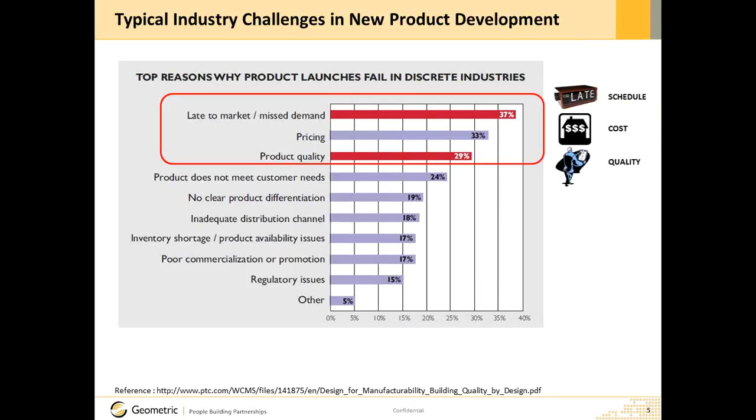Can design influence manufacturing time? Definitely. Choice of a thick wall in case of plastic parts, choice of a slower manufacturing process. For example, sharp corners in a machined part could lead to choice of EDM as the manufacturing process, thus impacting not only time but also cost. Choice of exotic materials could lead to higher material cost impacting pricing. Tight tolerances lead to additional secondary processes, thus increasing manufacturing time and cost. They also put a higher demand on machine process capability, possibly impacting product quality.

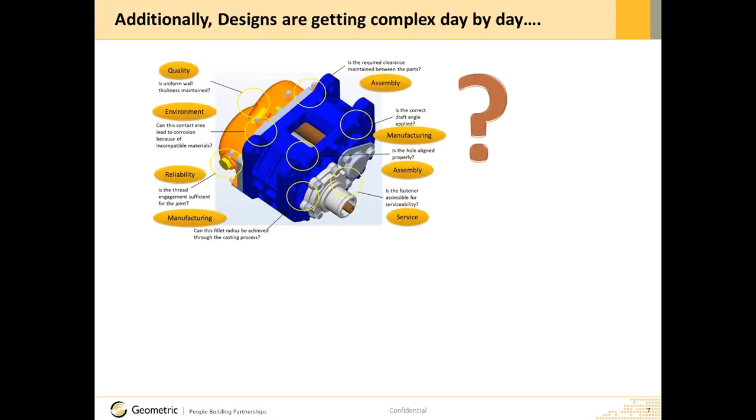There will be rework, impact on quality, higher cost, and whatnot, finally leading to failure of the product in the market. How can you as a design engineer address these challenges in a systematic manner? By applying Design for Excellence or DFX in the design process in your organization.

Design for Excellence consists of methods, guidelines, standards, and checks for creating better products focused on providing benefits in multiple stages of the product life cycle. Geometric provides solutions for organizations to practice and implement Design for Excellence in a systematic manner.

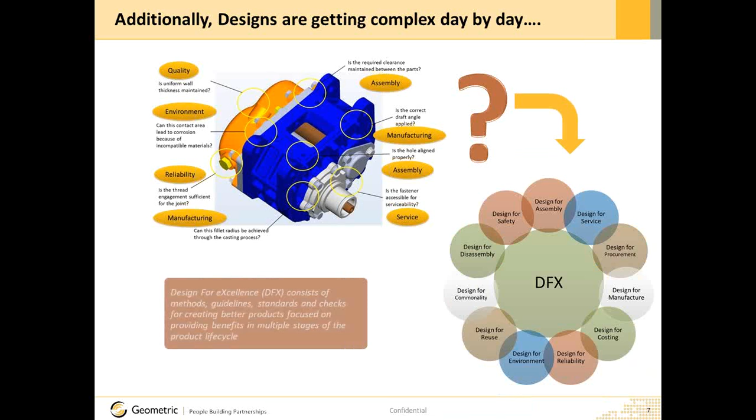Geometric DFX is an extensible standalone platform and framework which facilitates the DFX initiatives in your organization. It consists of various components such as inbuilt best practices, a rule engine, packaged technologies such as feature recognition, thickness analysis, among others. Also, report generation facilities. The DFX rules or best practices are derived from various sources such as in-house manufacturing experts, customers, design handbooks, and various standards.

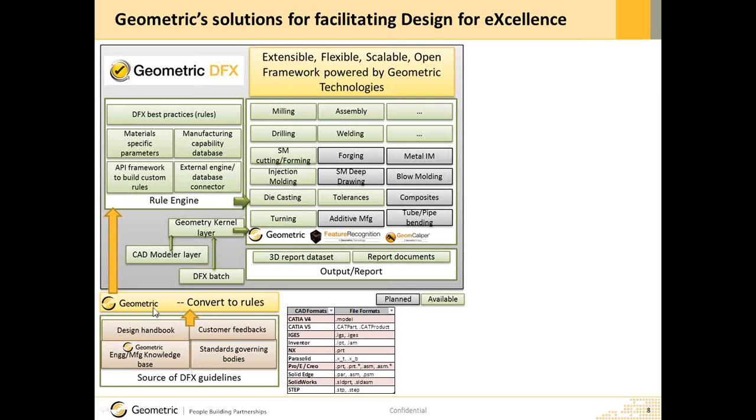For ease of use of this solution for design engineers, we have packaged the solution focusing on manufacturing and assembly and created an add-on on popular CAD systems such as PTC Creo Parametric, Siemens NX, and SolidWorks from Dassault Systèmes. DFM Pro brings the extensible and customizable Geometric DFX framework to your CAD system. Today's demonstration will explore DFM Pro for Creo Parametric in depth. Watch out for forthcoming web sessions covering other CAD platforms.

What does an easy-to-use design for manufacturing validation solution for design engineers need to have? A CAD PLM integration, a strong, extensible, and configurable knowledge database, and a facility to collaborate with effective reporting. In the following demonstration, we will see how DFM Pro provides this and much more. Let's shift to a live demo.

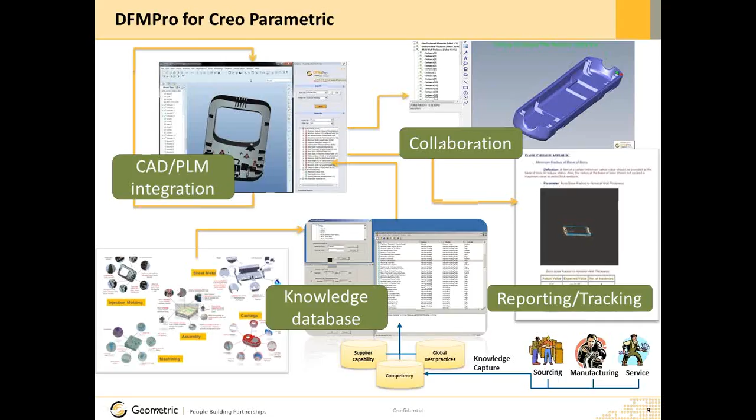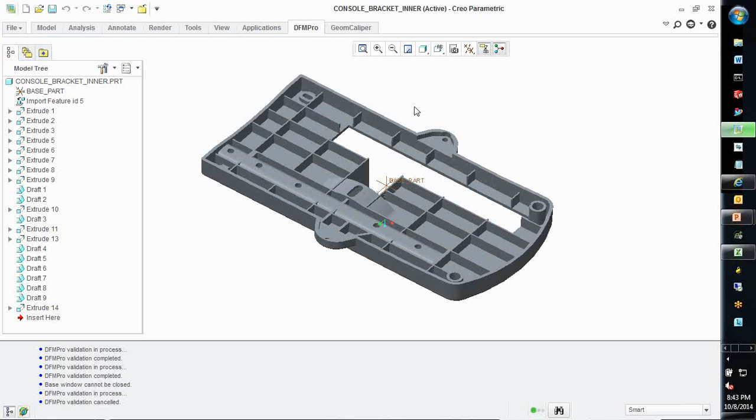I have Creo Parametric open on my screen now. As we can see here, DFM Pro is tightly integrated within the CAD environment, in this case, Creo Parametric. DFM Pro will provide recommendations to ensure that your designs are created as per well accepted global and organizational best practices. Let's consider a regular use case in the design of a plastic part which has to be injection molded. We have reached a logical state of the design.

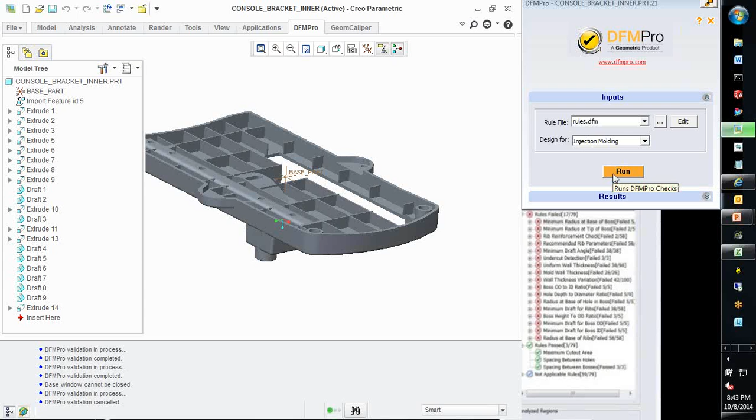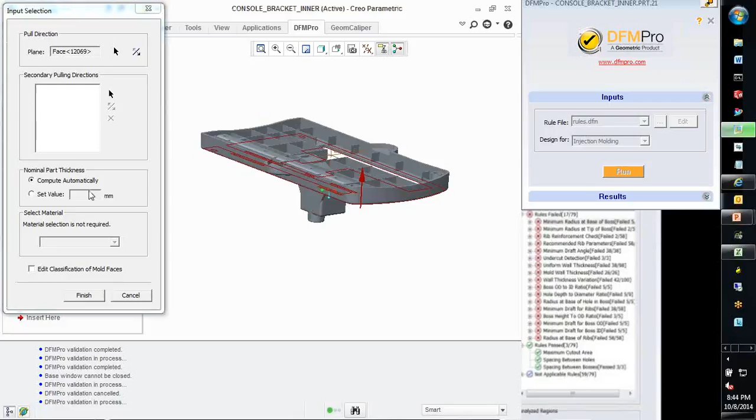As a design engineer, I want to validate my design to ensure that it is going to be easy to manufacture. DFM Pro can be launched at the click of a button. I select the relevant manufacturing process, in this case injection molding, and start the validation. For injection molded components, DFM Pro will identify the pulling direction along which the mold separates. If required, we can flip or change this direction. Additionally, DFM Pro will also compute the nominal wall thickness of the part, which can also be overridden by the user.

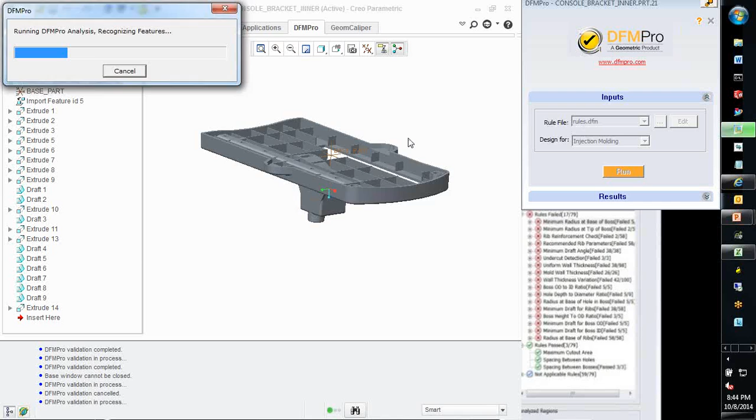In addition to the manufacturing process, the second input for DFM Pro is the rule file, which contains the list of checks to be used for evaluating the manufacturability of this model. DFM Pro identifies all the manufacturing features on this model. For plastic parts, features like nominal wall, draft angles, ribs, bosses, and undercuts play an important role in determining manufacturability. Based on the identified features and their parameters, rules specified in the rule file are applied, and any recommendations are shown to the user in the results section.

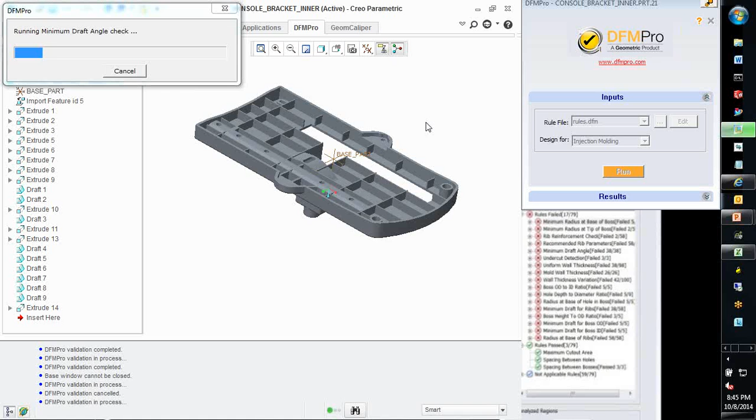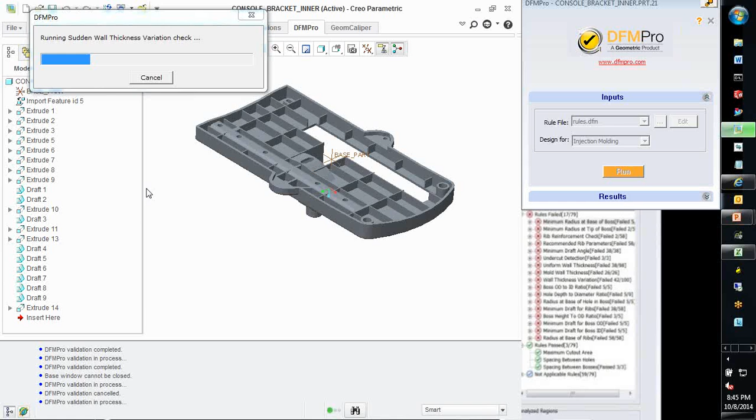What's important to me as a design engineer is quick identification of those areas of the design which can negatively impact manufacturing quality, time, and cost. DFM Pro helps you do exactly that. As you can see here, it processes each individual rule which is selected in the rule file. Manually validating this design would take hours, whereas DFM Pro can do that for you in a couple of minutes. Now on the right hand side of the screen, we will see the results in the results section.

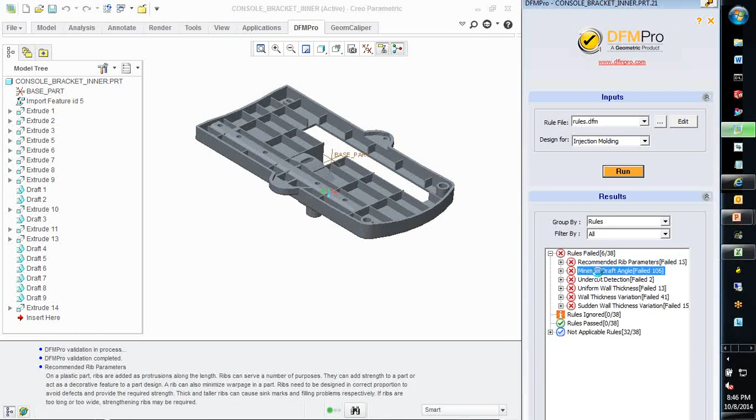When I click on any rule right here, in the message window or the dashboard area at the bottom of the screen, we can see the corresponding summary of the rule. This provides the required explanation so that the appropriate downstream manufacturing knowledge is made available at the design time, right when it matters.

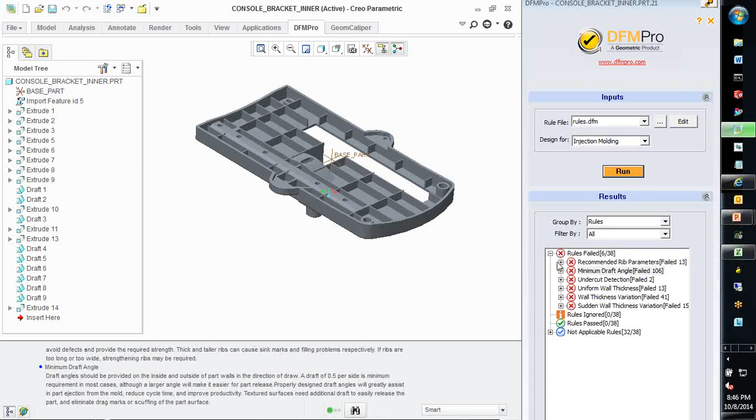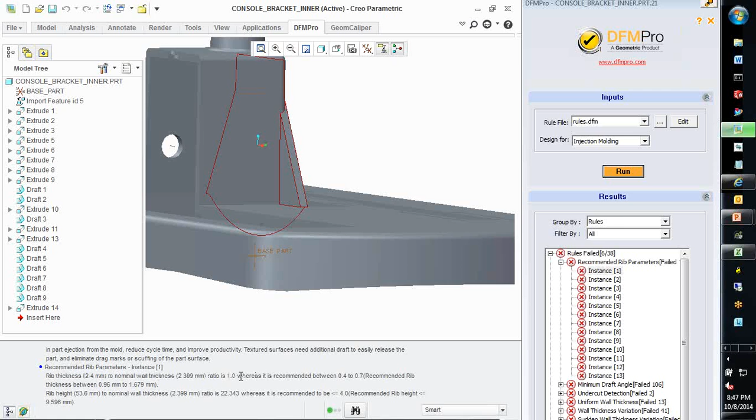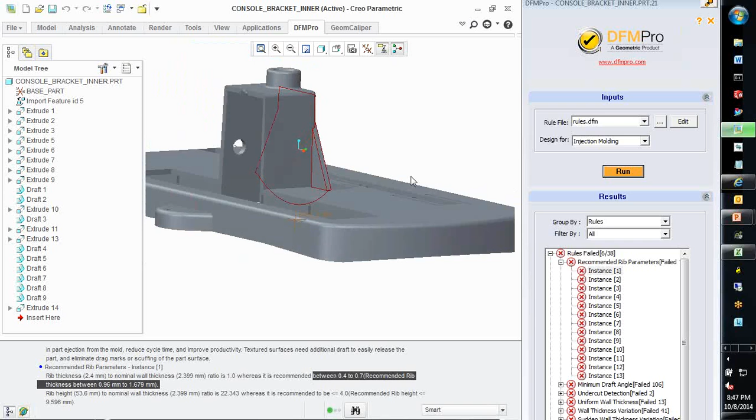For example, here this instance tells me that the rib is too thick; the rib thickness to nominal wall thickness ratio is too high. It not only shows me the associated rib in the graphics area, but it also shows me the current value in the dashboard and the recommended value. This helps me improve my design such that it will be easy to manufacture without defects. Thick ribs can lead to sink marks, hence I need to reduce this thickness. I can get more information about the reason behind this recommendation by launching the help file.

In addition to a compiled help format, the help file is also available as an HTML document so that organizations can host it on their intranets and edit the help file to include their own internal best practices and tribal knowledge. The help file provides a detailed explanation of the rule, the recommendations with an appropriate image.

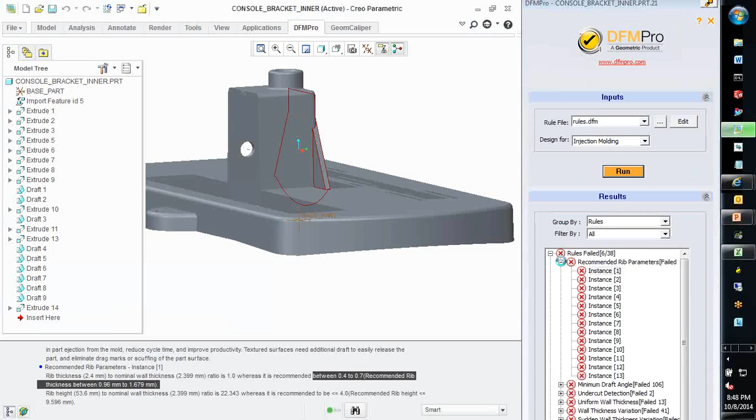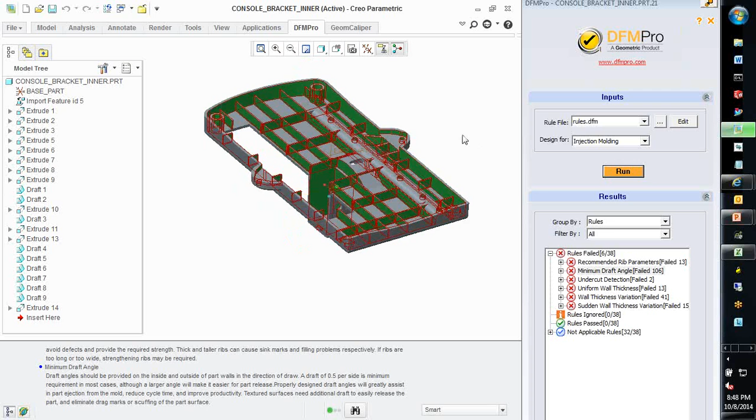We can see that there are too many failures for the minimum draft angle rule, and I know the reason for this. I have not applied any drafts as per my normal design practice. I will apply draft when I am done with the basic design and before I round the sharp corners.

This check in DFM Pro helps me ensure that I don't miss out on any surface for the required draft. Thus, DFM Pro watches my back while I concentrate on the design functionality. I do see instances during the daily design activities where DFM Pro helps address any oversight on my part.

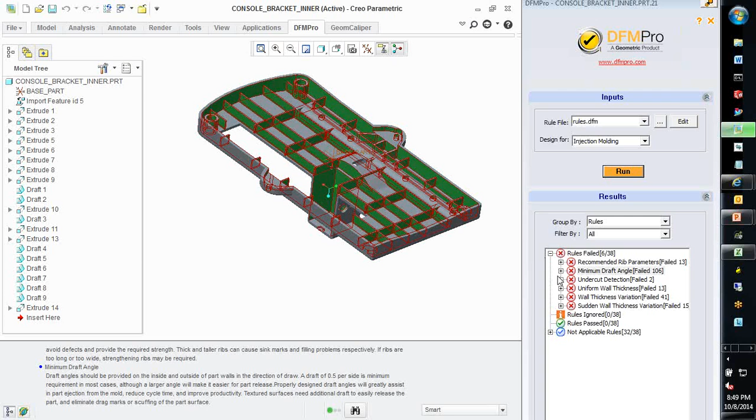Now look here. This is a modeling error and it has led to an undercut. Definitely this is not intentional. Undercuts would need side actions, lifters, moving cores, thus leading to additional time and cost. The undercut detection rule identifies such regions in the model.

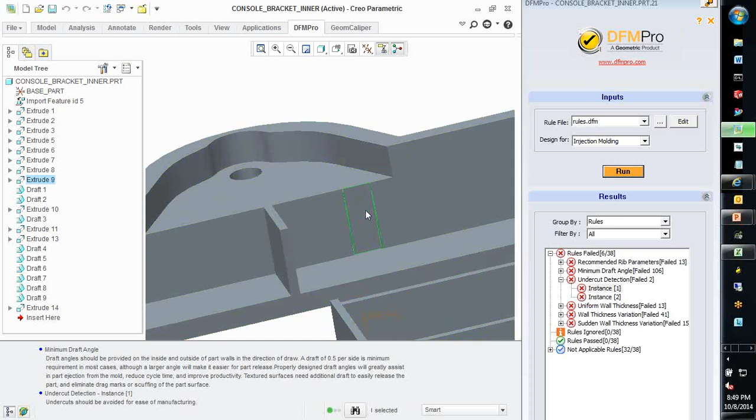I can then decide if it can be eliminated by slight modification of the design or it needs to be handled in tooling. For this part, I need to figure out how to correct this modeling error. Can I just delete these faces or modify the related feature? That's part of the CAD design process which I do every day.

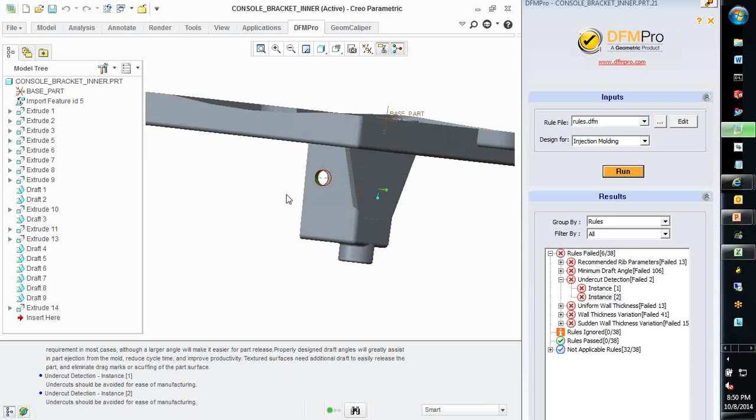On the other hand, in this case, I have a feature here which is an undercut, but this is a design requirement. I know it is going to require additional tooling, but I feel it cannot be avoided, so I am going to go ahead and ignore it. I will capture an image and add my comments.

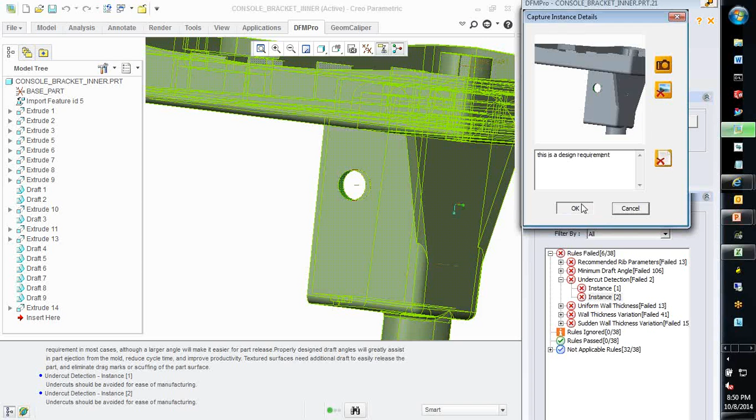These details will be communicated to manufacturing when they look at this part, and my DFM report. We'll come back to the cool reporting aspect in a short while. Thus, we can see DFM Pro helps me detect many of the downstream issues as I am designing my part.

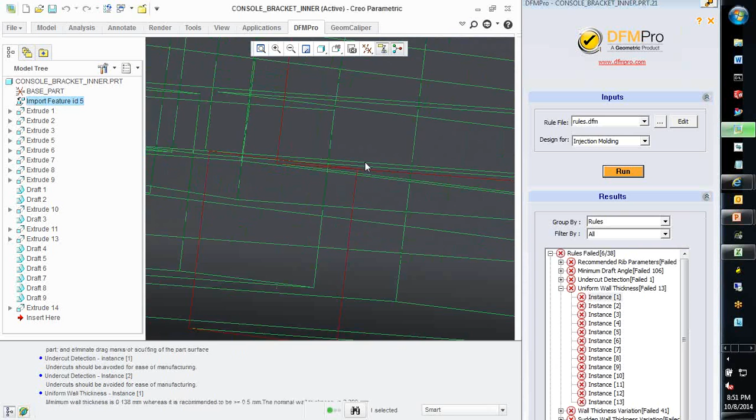DFM Pro also helps detect thick and thin regions in plastic parts. The uniform wall thickness rule checks areas which can cause problems during filling and also lead to quality issues. Here we have a region which is very thin. In the message window, we can see that it's just 0.138 mm, far less than the recommended value.

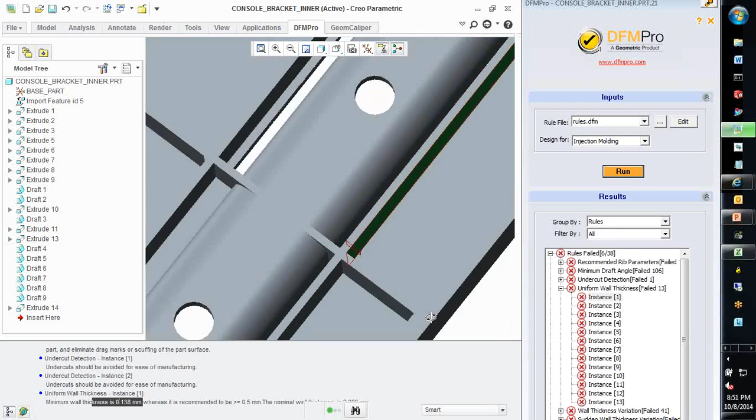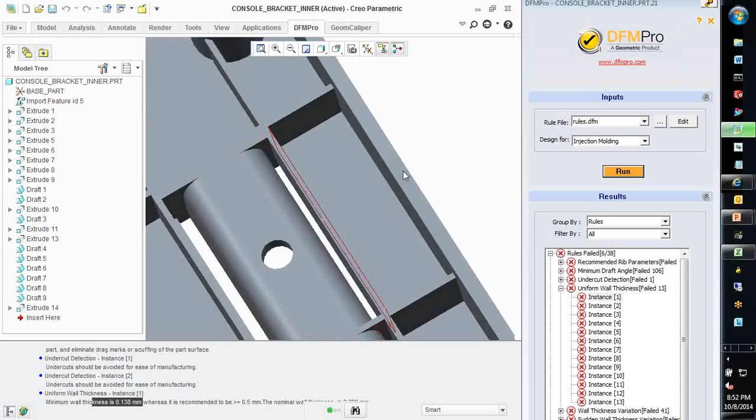On looking closely, we can see that a depression on the other side has led to this thin region. I will collect all the information required, know more about the rule, and then I can correct the design. Let me add a round here to increase the thickness.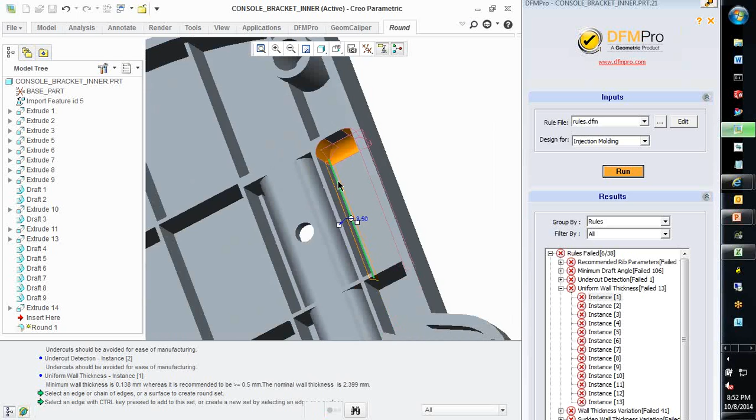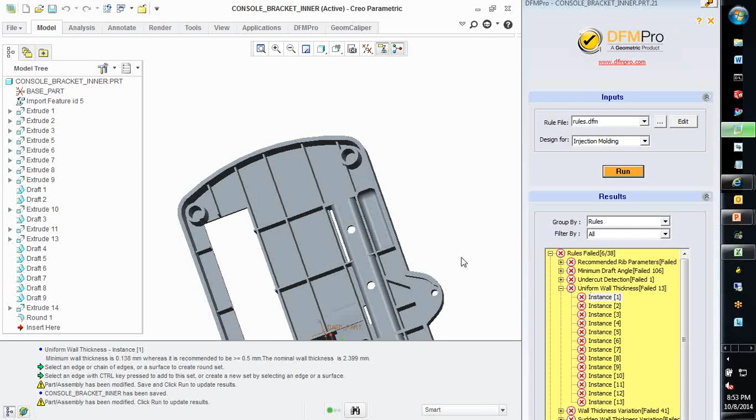Now that I have modified my design, I can rerun DFMPro and check what is the impact. As you can see, the background turns yellow, telling me that the results are not in sync with the design.

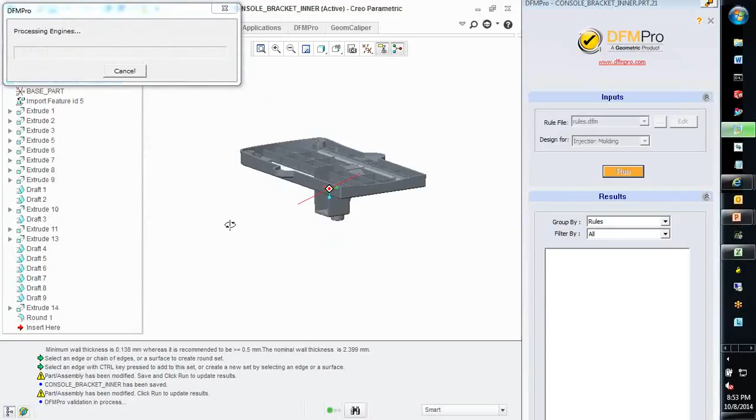As a design engineer, I am interested in quickly verifying the design, understanding the reported recommendations, and improving the design iteratively till it is as per the recommended guidelines of the organization and fulfills the design requirements. DFMPro helps make this iteration happen on my desktop before it can be sent for review or for manufacturing. Thus, a lot of review hours and rework can be avoided.

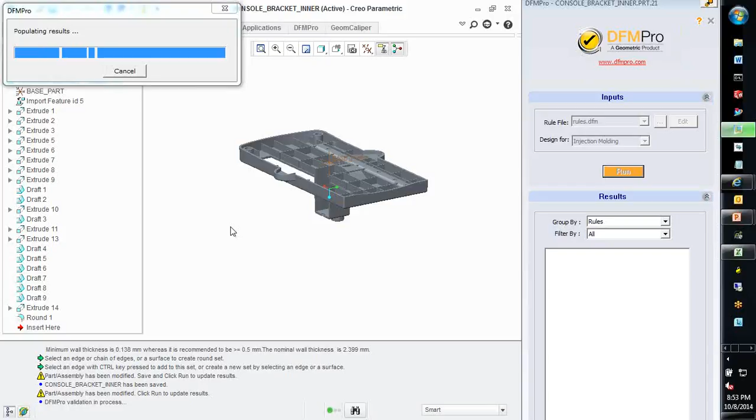In this case, DFMPro will relook at the design, identify the modified region, recheck that region, and present the results to me as before. We will see that the count of the wall thickness recommendations will decrease because of the design improvement. And yes, the count has decreased from 13 to 10. That region has now passed.

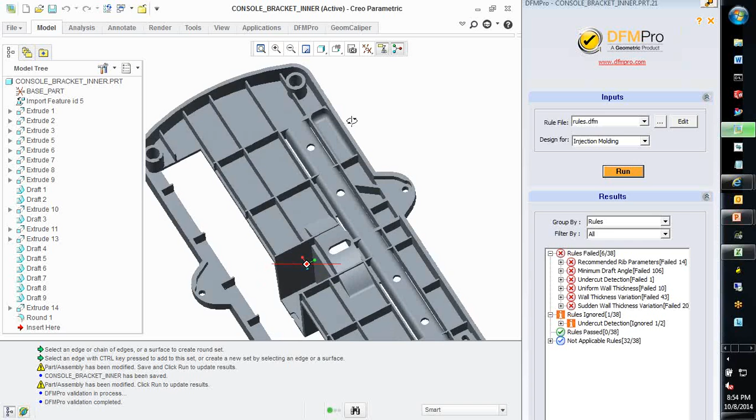It's not necessary to run DFMPro after every design change. You can keep on doing your design modifications, look at the results, and after you have done a few of them, you can iterate over the design to ensure that you can move to the next step.

Another aspect you may be wondering about is the rule file I mentioned earlier. Where do these rules come from? How do I configure them? The process is very simple. As a design engineer, typically you will not need to look into those details. But let me just show you what's going on behind the scenes. I clicked the edit button to launch a small utility called the DFMPro Rule Manager.

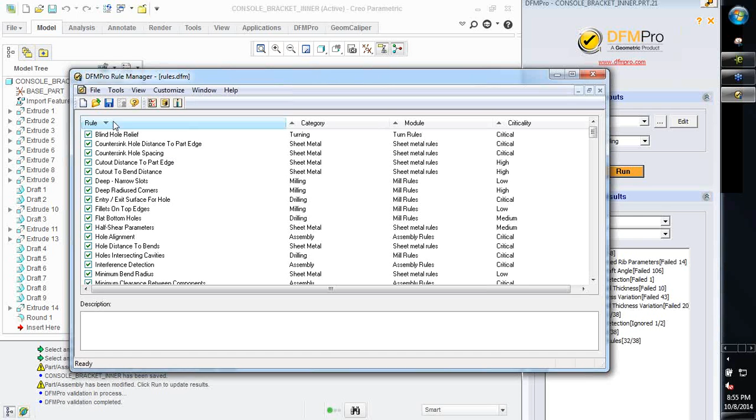Typically, when organizations deploy DFMPro, it can be used out of the box with inbuilt best practices and configurations, or we can create new rule files, select the appropriate rules based on the manufacturing processes in the organization, configure the ones which are required for modification, leave the other ones, and save the complete set as a rule file. This rule file can be reused again and again.

Rule file creation is typically a one-time or infrequent activity. During day-to-day design, I don't even need to click the edit button or look at the rule file. Using this mechanism, DFMPro helps organizations capture not only the organizational best practices, but also supplier-specific ones, and make this downstream knowledge available when it really matters. That's during the design stage. This helps me save a lot of rework using the power of the knowledge available at my fingertips.

As part of the design review process, DFMPro also helps me quickly generate reports which I can submit for review. DFMPro supports three kinds of reports. First, a 3D report in the eDrawings format, an XML report which can be viewed in the web browser, and an Excel-based report which can be used for tracking purposes. Let's look at these reports individually.

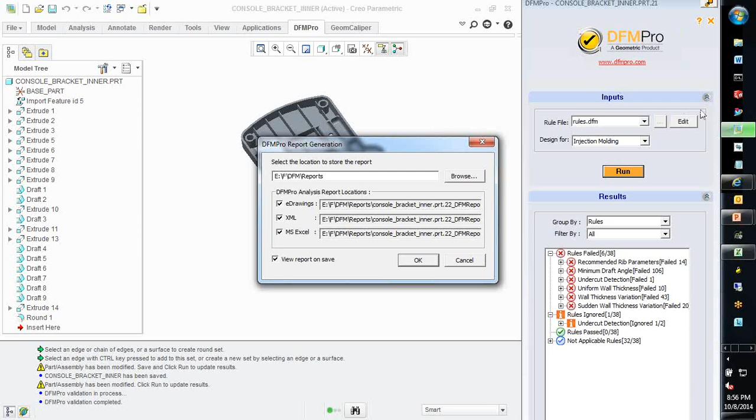The XML report provides a summary of the complete manufacturability analysis, starting with the environment and the settings. It presents a summary of the results and information of how many instances were validated, how many passed, how many failed. This is repeated for every rule.

For every rule parameter, a table is presented to the user which shows the actual value of that parameter in the CAD model, the recommended value specified in the rule file, and the number of instances which failed. We can see that this information is common for all rules. The ignored warning is also captured separately.

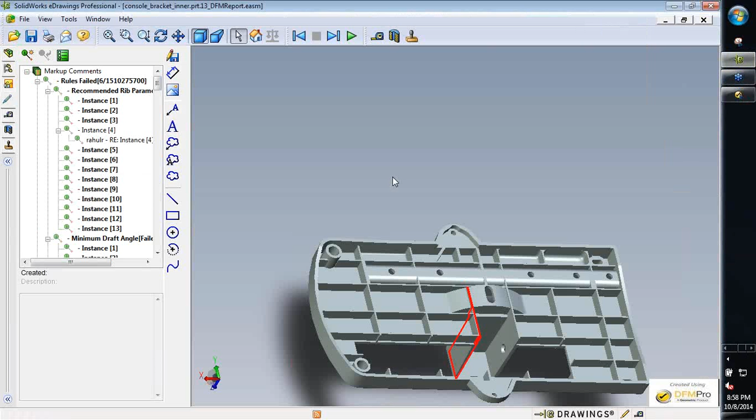On the other hand, the 3D report is more interactive in nature. It contains complete information about the analysis along with the CAD model in compressed format. It can be viewed in the free viewer and is delinked from the CAD system. Hence, it can be shared with any user inside the organization or outside who may not have access to the CAD environment. Thus, it forms a very easy means of effective collaboration.

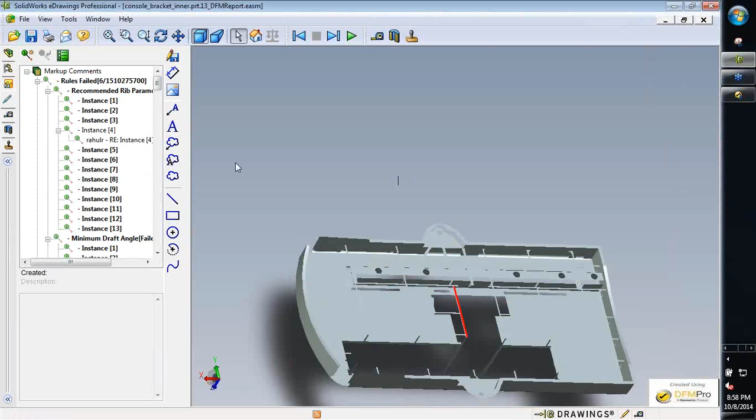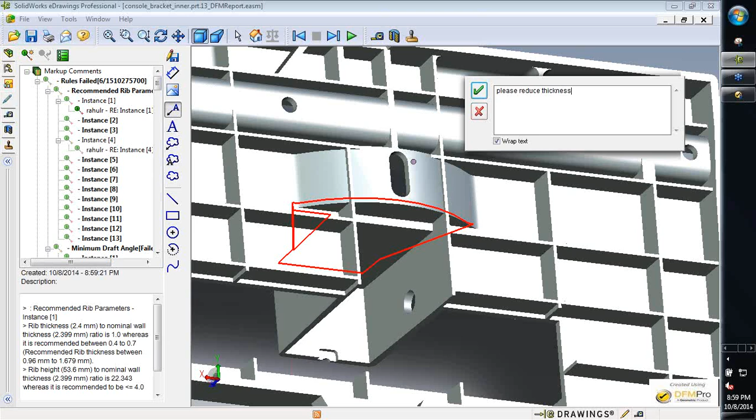Just like in the CAD environment, when we click on any instance, it is highlighted in the graphics area and the recommendation is shown in the description area at the bottom left corner of the screen. In addition to this, it also has annotation and markup facilities. This helps me record my comments in that same report. That's why it becomes a very effective and easy tool for collaboration.

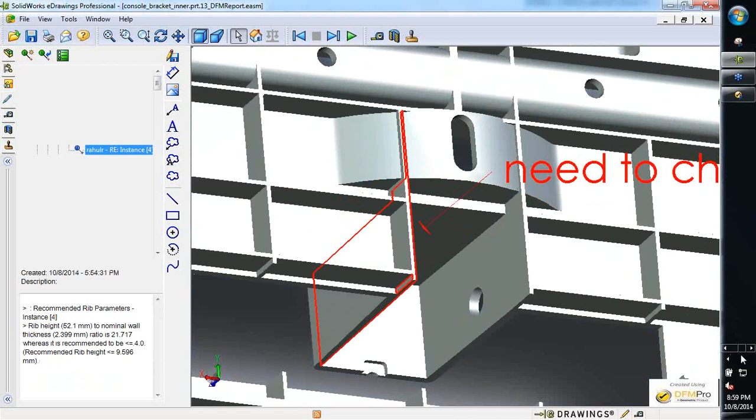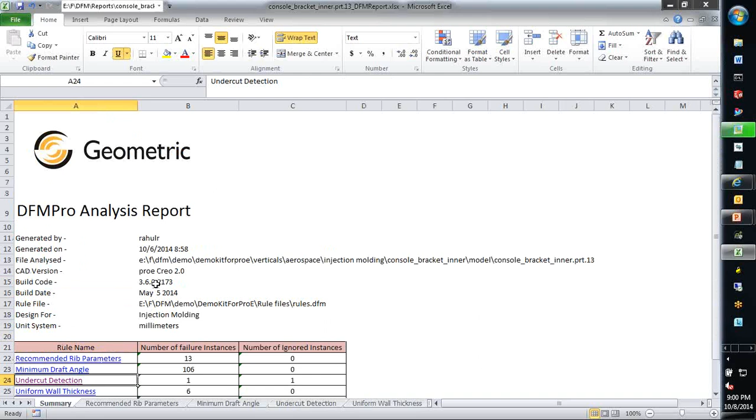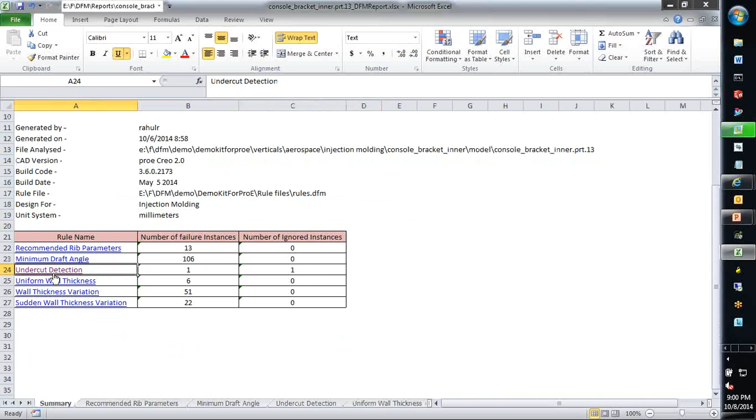The Excel report is very useful for tracking purposes. Based on a customizable template, it provides a summary sheet with links to individual results for every rule. In the detailed rules page, we can see there are additional columns for tracking your action items to closure. Ignored items are also captured with the image and the additional comments.

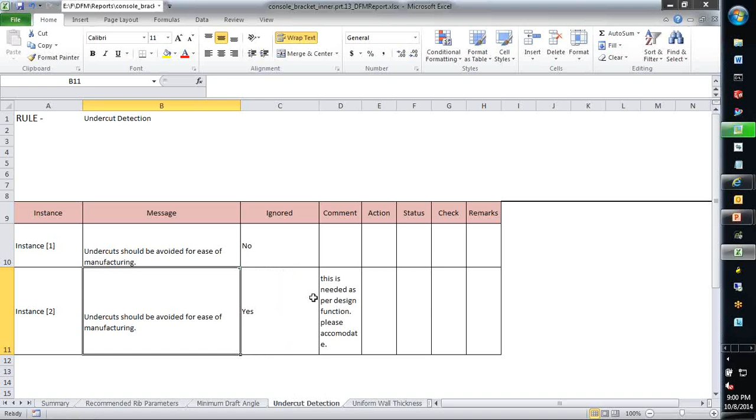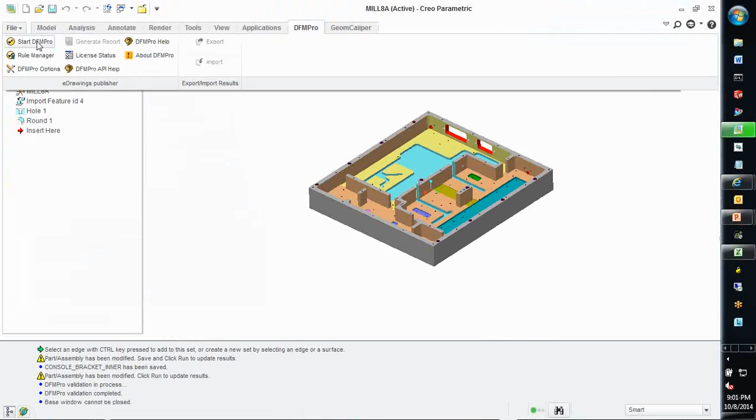As a design engineer, I work with not only plastic parts but also machined sheet metal parts and assemblies. DFMPro helps me during design of those parts as well. Let's look at a machine component. The same rule file can be retained for all processes. I'll select prismatic mill as my manufacturing process and execute DFMPro. For machine components, features like holes, pockets and slots are identified.

Since we use our patented feature recognition technology for identifying the features, the same results would be obtained based on the final geometry of the model, irrespective of the design steps. Even if the model is imported, say as a STEP file from a different CAD system, you would still see the same kind of results. In this part, you can see it's a mixture of imported geometry and certain design features.

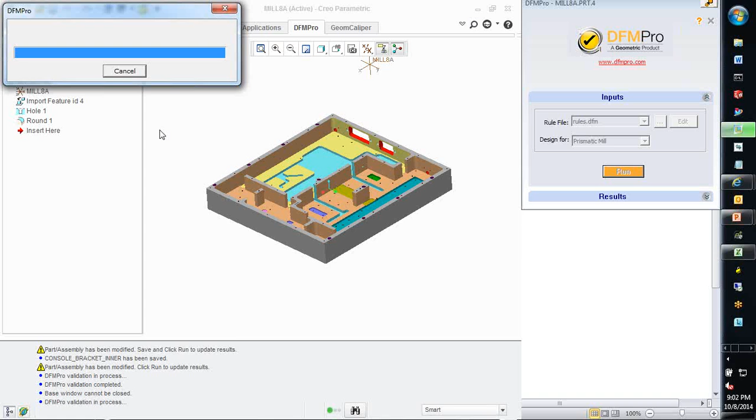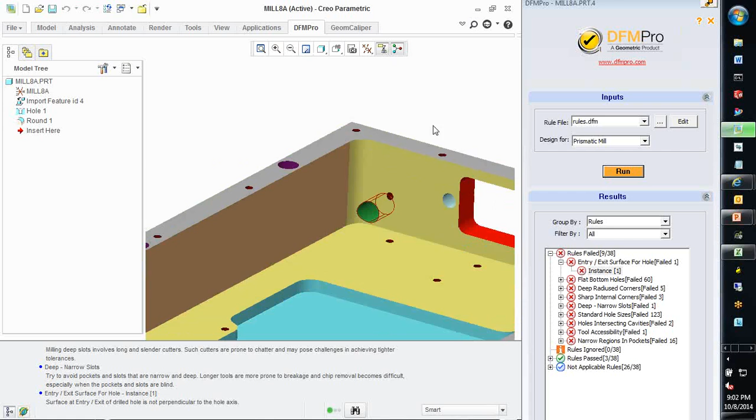For machine parts, important considerations like angular holes, sharp internal corners, deep narrow slots, deep radius corners. All these checks are done in a couple of minutes. Let's go quickly through some instances. Here we can see that the hole exits on a non-planar surface, which can cause drilling problems. We have many examples of flat bottom holes.

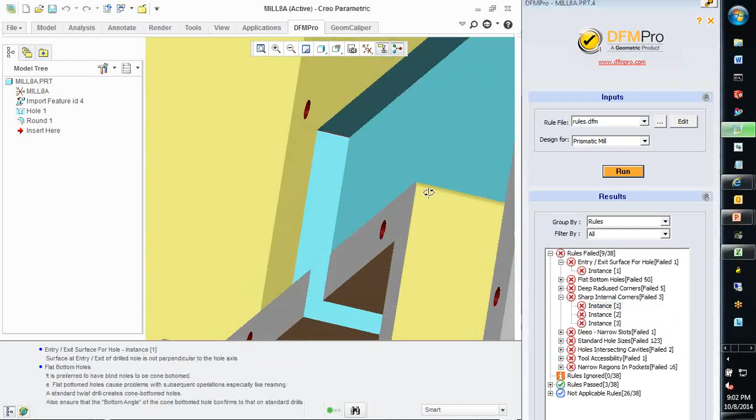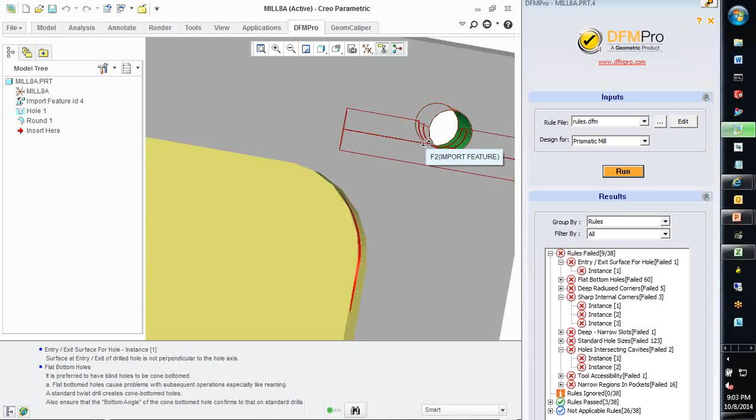Here's an example of a pocket with sharp corners. Here are two intersecting holes, but the axis is offset. So this can cause drilling problems again. You will find that this dashboard area provides the reason for this rule and what can be the recommended action.

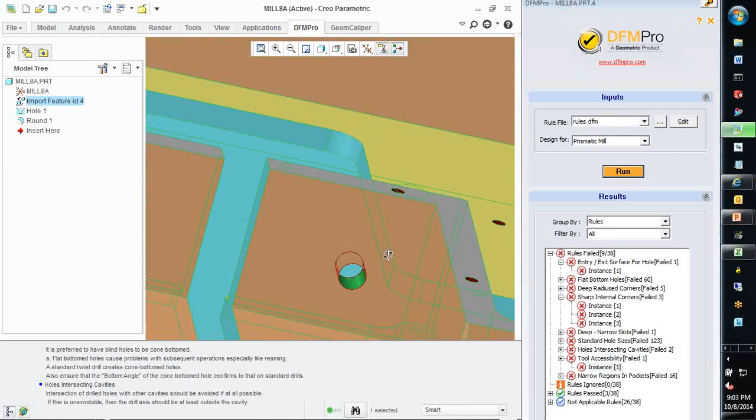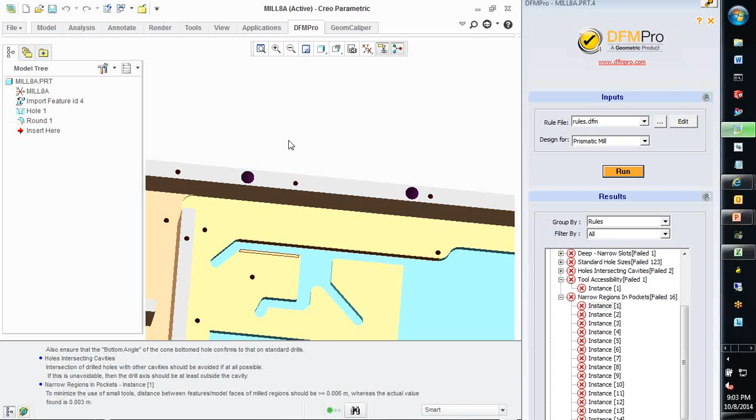Here's one instance of an inaccessible feature. This rule detects such narrow regions. Do we have a tool which will ensure that this area can be machined easily? Based on the configuration, DFMPro can help you check very quickly whether your part is easily manufacturable or not. Let's look at a sheet metal example now.

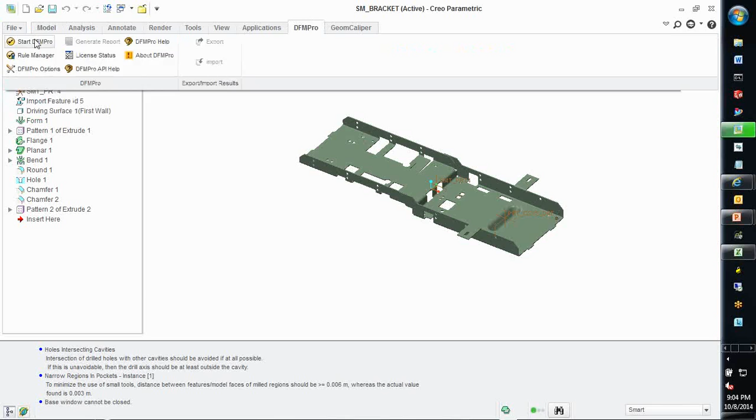In today's webinar, we are just covering a broad overview of the capabilities of the software. We will have follow-up sessions where we will cover each of these rules in greater depth and also cover other CAD platforms. Again, the workflow remains the same. I use the same rule file, just change the manufacturing process and execute. In case of sheet metal, features like bends, flanges, cutouts, stamps are identified and the selected rules are applied on this model.

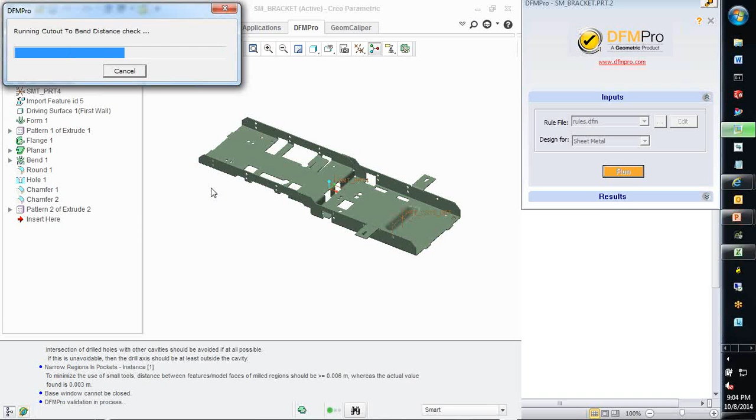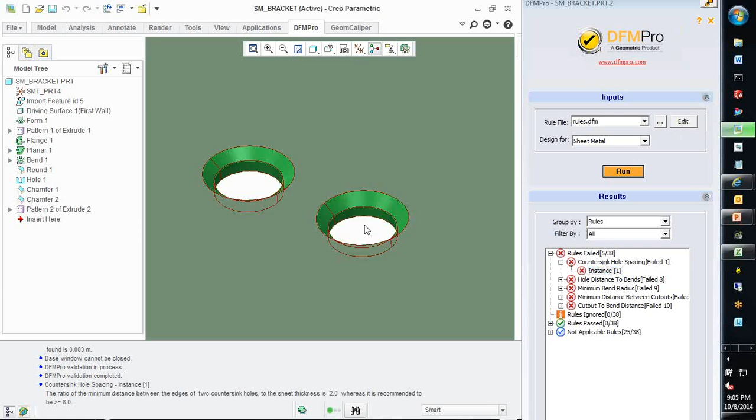The advantage of DFMPro is that even if you have designed the sheet metal part using normal modeling features and not using the sheet metal features, still you will get the same kind of results. For sheet metal, issues related to feature spacing, such as in this case, we have two close countersinks, or features being very close to bends, like in this case. Less bend radius based on the material configuration.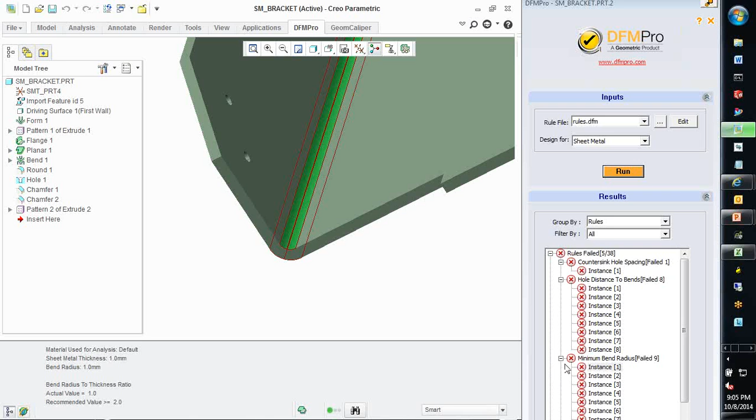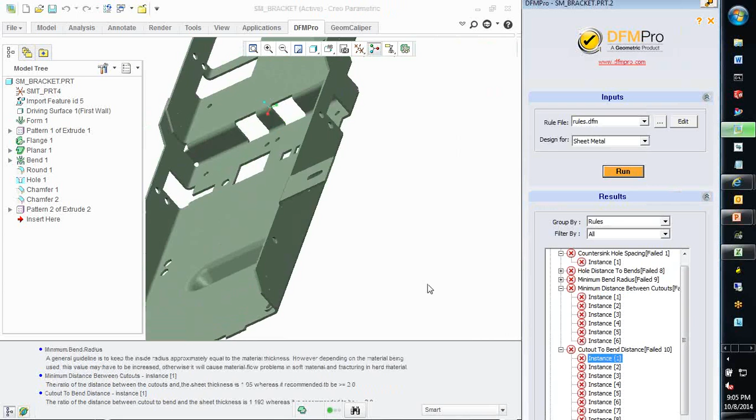Again, an example of feature spacing, distance between cutouts, the hole distance to this cutout, cutout distance to bend. These are just a few of the examples which DFM Pro can help you validate quickly as you create the design. And what about assemblies? You can also validate your assemblies using the same kind of process.

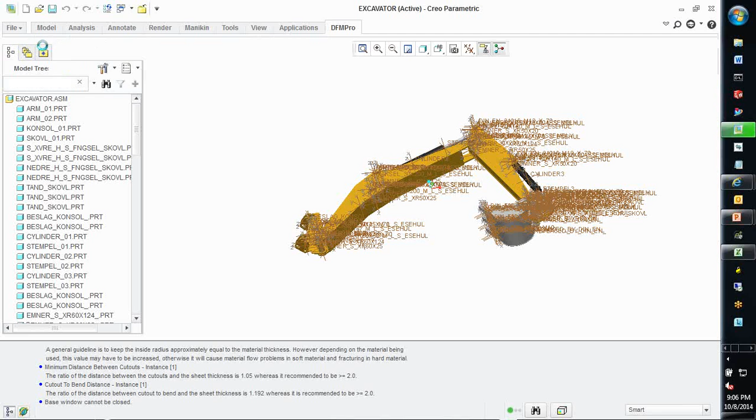I start DFM Pro, select the appropriate rule file. In this case, I select design for assembly because I want to check for the assembly process, and execute DFM Pro.

Assembly checks in DFM Pro include hole alignment, fastener clearance, fastener accessibility, interference, among others. The hole alignment check helps detect axial and angular misalignment of holes in the assembly. Fastener assembly checks help ensure ease of assembly as well as disassembly. This not only prevents some of the assembly problems on the shop floor, but also avoids operational issues.

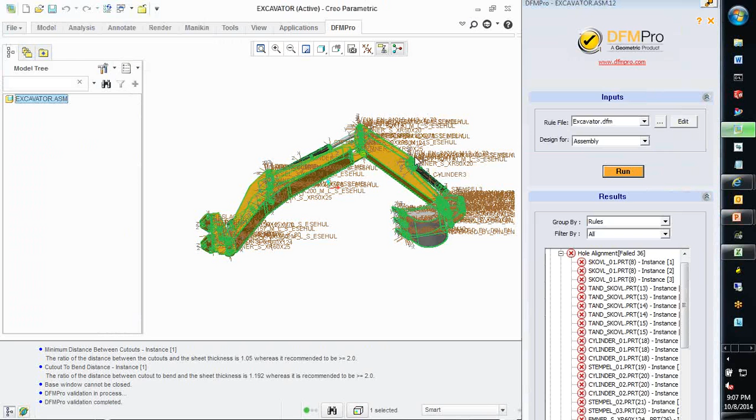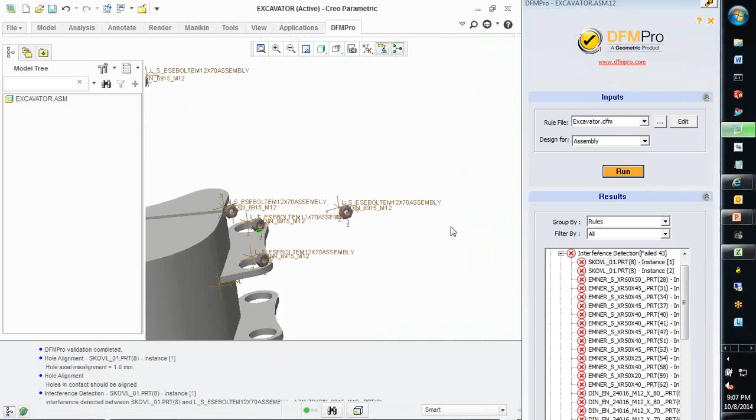Here is an example of a hole alignment issue. In the dashboard area, we can see the amount of axial misalignment. An example of an interference check, definitely this is not intended.

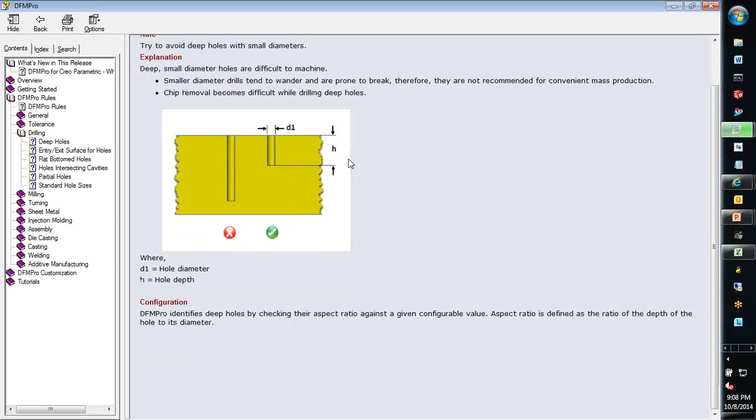Similarly, there are other checks related to fastener accessibility, fastener clearance, engagement length. Each of these have different benefits in terms of the assembly and disassembly on the shop floor or in service. We can get more information on all of these checks through the help file. Each rule has very detailed information covering the explanation, configuration, and any recommendations.

Thus, DFM Pro allows you to cover a vast breadth of processes and in each process a great depth of individual rules. This helps ensure that your designs can be quickly verified for manufacturability, assembly, and corrected right when you are designing them.

This demo was just a glimpse of the various examples in which DFM Pro can be useful for you. We covered a broad overview of the software and how it can help you in the design process.

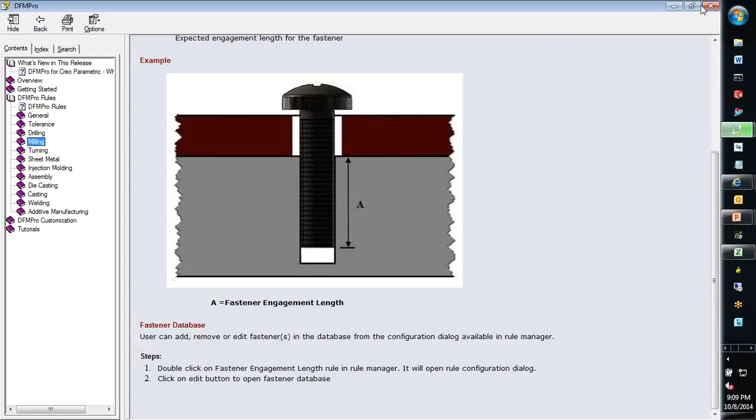Let's move back to the presentation and look at the benefits you and your organization will get by adopting DFM Pro. DFM Pro can benefit you and your organization in many aspects. Productivity improves due to reduction in design iterations and DFM analysis time. Reduced number of defects results in improved quality, in addition to reducing time required for reviews.

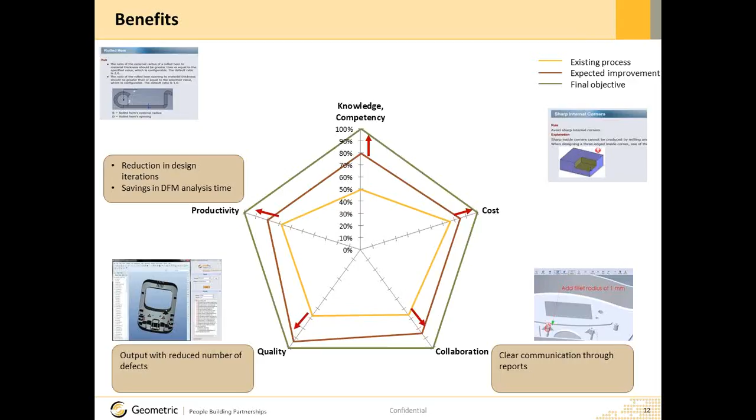Standardized reports automatically generated by the tool help in easy and quick collaboration. Identification of design areas which can be difficult and expensive to manufacture ultimately benefits the product cost. DFM Pro facilitates capture and reuse of global best practices. It provides a framework to retain and disseminate the manufacturing knowledge in the organization. Statistics on the recurring design defects can help define training needs.